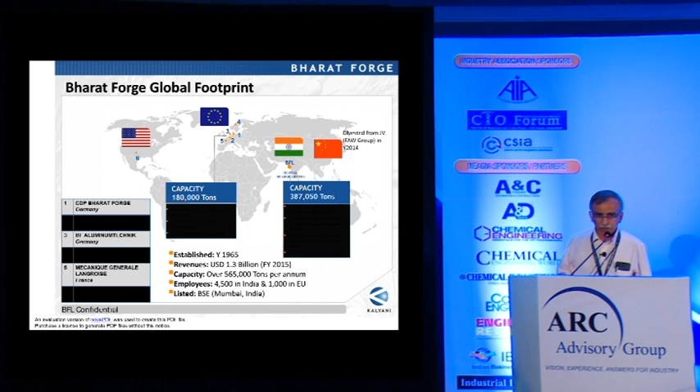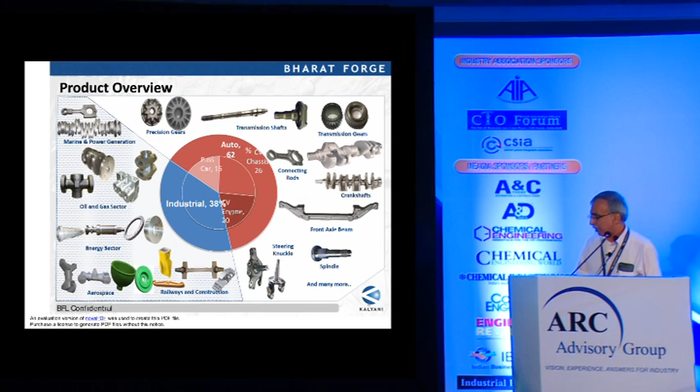Talking about the footprint from a global perspective, primarily we have manufacturing facilities in various parts of India, and then in Europe. And our combined capacity is something like 565,000 tons per annum. And this is primarily to take care of various global customers. From a product overview perspective, 62% goes to automotive industries, both the passenger car, commercial, and off-highway and military vehicles. And then 38% comes from industrial products, which covers oil and gas, energy, aerospace, railways, and construction. So this is how the product portfolio is distributed.

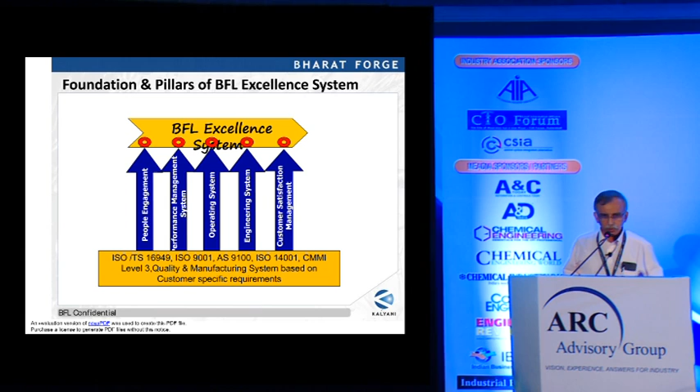Talking about the mantra of excellence, we started this process about 5 years back. The whole objective is to achieve excellence in everything we do, right from the human resource function to the sales function. And this is what is helping us to stay fit with the competition growing and the profit margin shrinking. So this is what we believe, and this is what we do every day. So primarily it has 5 pillars: the people engagement process, the performance management systems, operating systems, engineering systems, and customer satisfaction management. This is a dynamic process, and every year we keep calibrating this model as we keep learning lessons with what has gone wrong and what we learn from new business opportunities and what we learn from new customers. So this is a dynamic model that goes through calibration.

Like any initiative, there are specific tools under this initiative, and the specific tool which is relevant to IIoT is value stream mapping. That's what we see here. In simple, value stream mapping, as you all know, is a tool for doing more with less, eliminating the waste in the system, and it also helps to increase velocity in the organization. That is how we have defined value stream.

And one big difference is that we do value stream mapping not only in manufacturing, but in every process, right from a human resource process, financial process, engineering process, etc. So we have really used it to the full potential as far as the power of the tool is concerned.

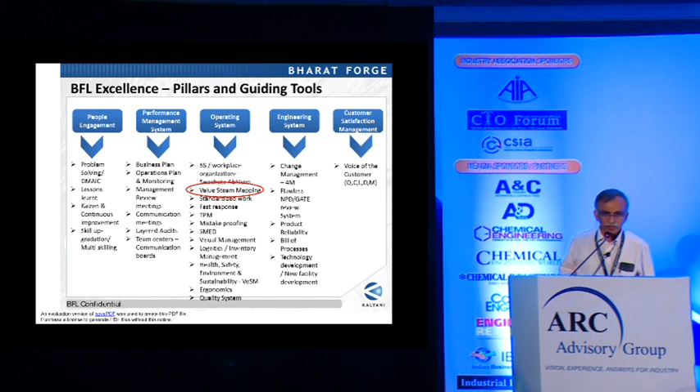Now, this is just to tell you, we did about 22 value stream mapping exercises covering various functions, both manufacturing and non-manufacturing, and that is how we could generate a lot of ideas for improvement in terms of waste elimination and increasing velocity in the respective function.

Now, coming back to value stream mapping, it typically talks about three things. One is a material flow that covers quantity moved, distance moved, and time. As far as information flow is concerned, a conventional value stream map talks only about the medium of information flow, whether it's electronic or paper-based or some other means.

So what we have done is we have strengthened the value stream map using two more aspects. One is, what are the media breaks happening in the communication process? What are the media breaks happening in information flow, which is very important in the organization as you get into a growing business, especially with multiple sites, doing business with multiple customers.

And the second thing is, what is the scope for digitizing what you do? So these are the two additional things we try to cover in value stream mapping and identify all those hidden potentials for addressing that activity.

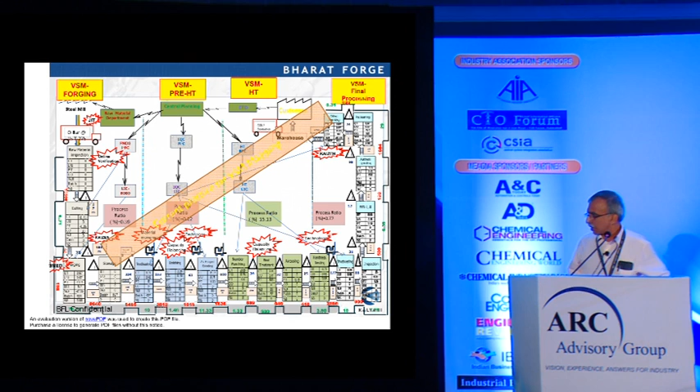This is how a typical value stream map looks like. I don't have to explain what it is. What we have done is, you can see something at the bottom here. We looked at all operations in terms of what is the information we are generating. Somebody talked about the data getting converted into information and then information aiding the intelligent decision-making process. So something very similar to that we try to do.

What are the kind of reports, how many reports we generate, and what's the total number of functions involved, and then approximate time required for each function. So we try to do an industrial engineering analysis.

Then the maximum time consumed or spent for the report, because there could be one bottleneck report which is very important for decision making. And then number of people and functions involved in all these transactions, and number of agencies to whom this is communicated. It's a very complex process as you start mapping. So this is the difference we try to bring into value stream map, which is normally not done.

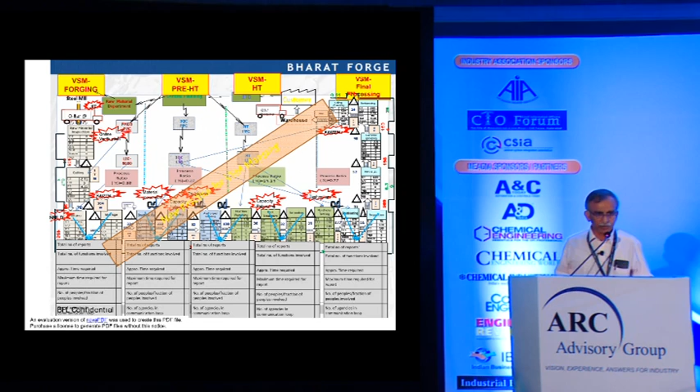So after that, we started analyzing this data in terms of what we can do to kill the waste. So we followed a simple methodology of ECRS, which is nothing but eliminate, combine, rearrange, and simplify. It's a very simple tool, but a very powerful tool to kill the waste in the organization. And that is how we could integrate Industry 4.0 and value stream map. So value stream map provides the input and IIoT gives the solution.

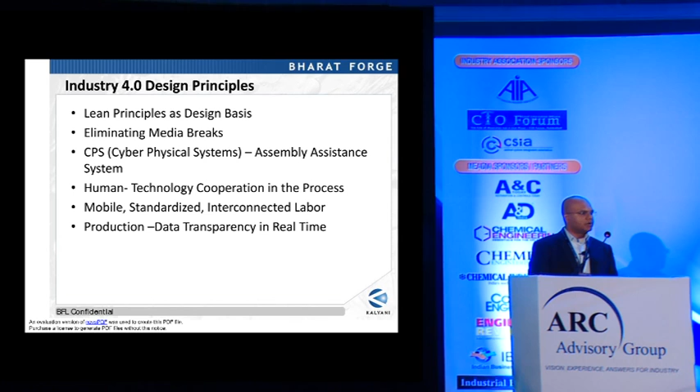We have decided 5 building blocks on which our Industry 4.0 journey will be built. The first is all the information which flows from top floor to the shop floor will be online and digitized. Second is all the information which flows from shop floor to the top floor will be again digitized and made real time. Based on these 2 flows of information, it will be visualized. So visualization will be built over this set of data.

So I'll present a case study on one of the forging lines where we have done the implementation of industrial IoT, or the top 3 blocks: the information flow from top floor to shop floor to top floor, and visualization of the data. So this is a 10,000 ton forging line where we primarily forge crankshafts and axle beams.

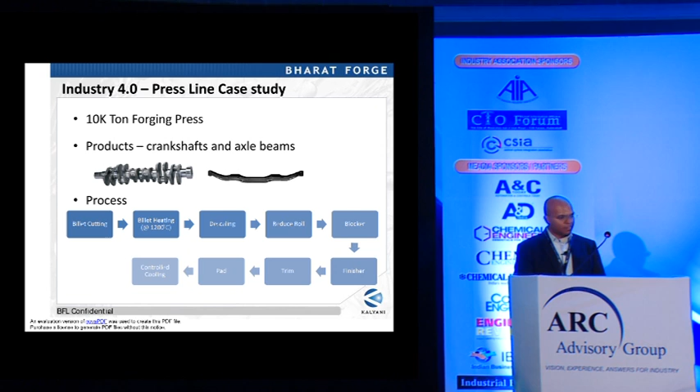The process is we get the bars. Bars are cut into cut-to-size billets. They are heated to around 1200 degrees Celsius. Then they are descaled. It goes through a preforming operation called reduce rolling, then a blocker operation, a finisher operation. After that, the flash extra material is removed, trimming, and then padding to realign the geometries, and then controlled cooling. So this is the process flow for the forging line.

The KPIs we monitor on this line are OEE, equipment utilization, productivity, material input and output count, so reconciliation of that count, how many billets were fed into the line, how many were the dropouts at what stages, and what was the final output number, and also the SPC, the product quality measurements.

There are a number of reports which are generated. There are about 7 BFL excellence charts which are generated daily. In every shift, 5 reports, so 15 reports are generated. All of these are on paper. Operational charts, quality charts, several of them. The measurements taken on the quality bench after the forging comes out at the end of the line are all manually done.

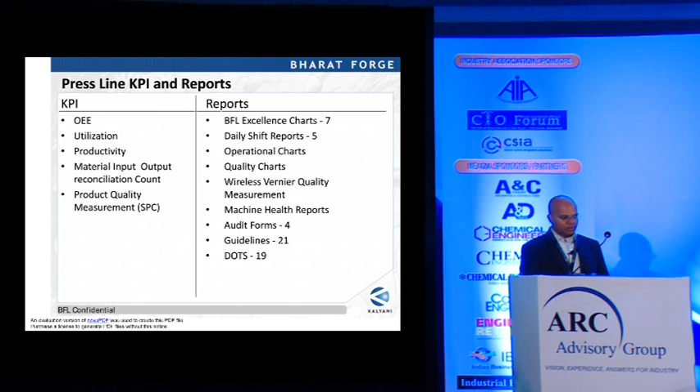Machine health reports, audit forms. There are 4 audit forms: layer audit 1 and 2, and then several machine audit forms. 21 guidelines and daily operator tasks, 19 of them. So all of this covers the complete gamut of reports and information which flows from top floor to shop floor and shop floor to top floor, which we have got on a single system and made online.

This is a general architecture of our line, where all the machines, starting from the billet cutting machine to the final cooling conveyor, are on a shop floor network. Now our shop floor network and office networks are totally separate networks. There is no communication between them, primarily because of the security and safety of those machines. So the office network doesn't talk to any of the machine networks.

That's why we put in an intermediate computer which reads the data tags available from the main press line, which has the master controller and is connected to all the other machines. So this central computer reads the information from the master controller and releases it to our data center.

So the data center is protected by firewalls. All the information which comes in and goes out is very much controlled.

Over it, the complete visualization and reporting layer is built, and then we provide reports. We'll have a look at several reports for all the stakeholders.

The stakeholders are the control panel room, the person running the line, the line supervisors, the shop floor manager, and the top management.

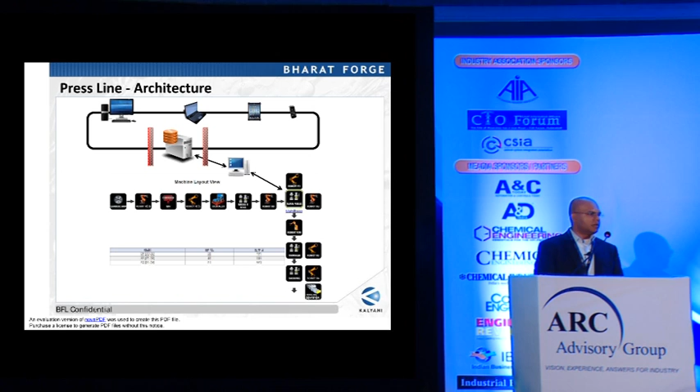So we have placed large screen dashboards in the line and also provided touch screens to the control panel operator.

Primarily the touch screen is where he only does the qualification of the downtime. So he gives, if there is downtime, what is the reason contributing to it. That is the only input he gives.

So today the manual entry on all the forms, the 5 reports and 19 dot forms and all the downtime report forms are eliminated, and all of that is now online.

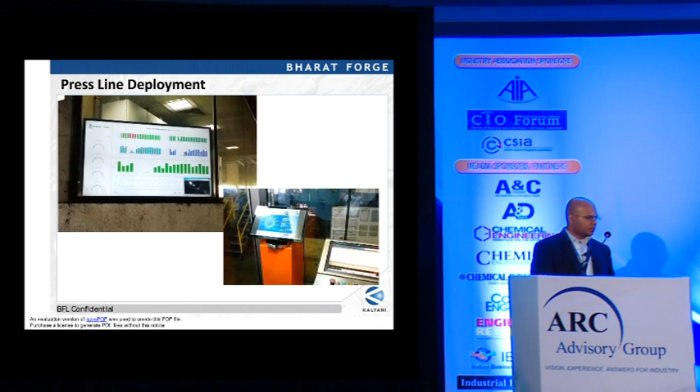Currently, we are also trying to remove all the other reports, because all of them are printed on paper and then displayed on the display areas in the line.

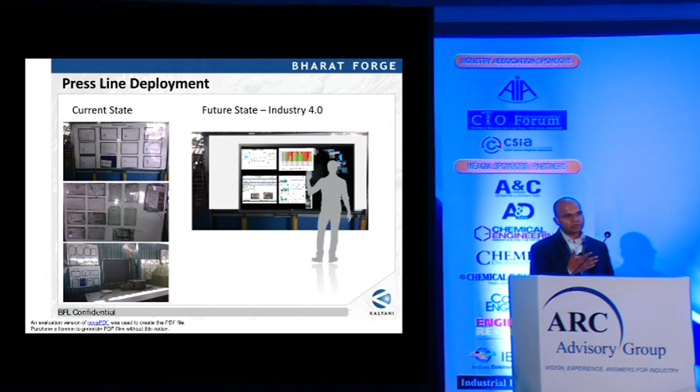We want to eliminate all of those input screens so that the reports shown can also be live on the dashboards on the shop floor.

What we do is we collect about 60 parameters from the master controller. These are 2 types of parameters: one is machine health parameters, where we capture the temperatures for the bearings and the lubrication cycles.

And process parameters, for line performance, where we capture how many billets were fed into the line, how many billets were coming out at the end of the line, what temperatures each of those billets were heated to, and what forces were applied.

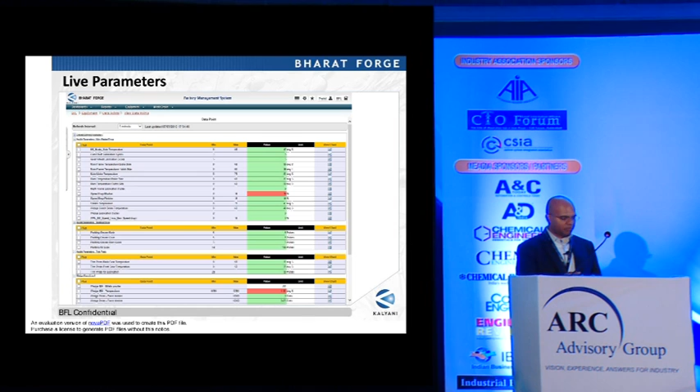So for each billet, we are capturing all of that information in real time and generating all the reports and dashboards which we saw earlier.

So an executive dashboard shown to the top management shows whether the line is up or down. It shows for the last 24 hours what has been the performance of the line, the trends of APQ and OEE, total number of parts produced, and also for the last 1 hour, the temperature trend.

So how the temperature trend has been for all the billets coming out. It also shows on the dial gauge the last 24 hours performance in APQ and OEE.

Along with it, it provides all the analytical reports required by the shop in charge. So it shows for the last 7 days what has been the APQ, what has been the performance of the line, and what has been the Pareto of the downtime reasons.

It also shows the die-based performance. This is available for 90 days, where we can deep dive from quarter level view to a day level view, and for 7 days, where we can deep dive again 3 levels to an hour level view.

So we can deep dive to a very specific hour, seeing what dies were forged, what parameters were there, at what temperatures they were forged, and what was the machine setup for the forces. All of that is available.

So this is another chart where it shows the last 90 days of performance, showing what all dies were forged, what all parameters were used to forge them, and we can deep dive into each one of them. So this is another view of the same report, showing the benefits which we have been able to achieve.

As this is a work in progress project, we are still learning a lot of things, but a few of the things which we have been able to achieve is eliminating a lot of manual data gathering and reporting. It has effectively eliminated about 2,000 hours of manual work annually. It has increased data integrity and availability, because earlier whenever there was a manual entry for downtime duration, there was always a question whether it's a correct record or not. Now we don't have such questions.

It also enables real-time OEE monitoring. So anytime anybody who is enabled can go and see what the OEE is and what are the contributing factors for OEE not meeting a target. It shows the equipment and process parameters in real time, and also enables faster responses if a situation arises where any of the points is out of control range.

It also has quality monitoring. At the quality bench, all the quality parameters which we measure are also going to the same system, so we are capturing the quality parameters against the production batch. SPC is also built over not just the quality parameters, but also all the process and forging parameters. SPC analysis can be done on each one of those.

It also has email and mobile alerts, and escalations are also built into them.

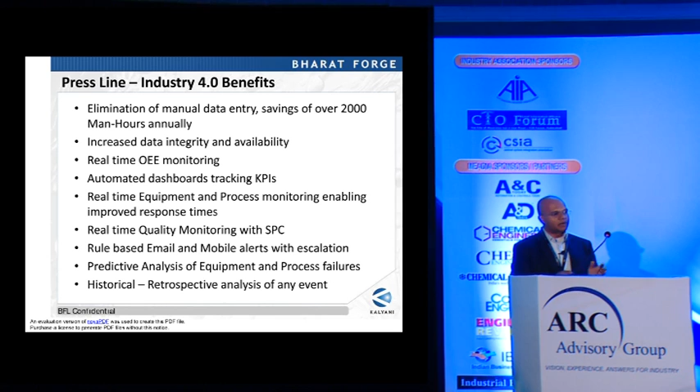Moreover, it also allows historical or retrospective analysis of any event. So if there is a question about a part in the machining shop, asking what were the parameters used to machine this because they are seeing something unusual, we always have all the history available for each billet, and that is a very strong point where we know what we did and what was the final result in the machine shops.

Other than industrial IoT, two of the other enabling building blocks are the digitization of material flow, where challenges in forgings are that the parts are at 1200 degrees Celsius, nothing survives on it. So that's one challenge which we are currently dealing with - finding out how we will track each billet from forging till the machining where it gets finally shipped - and also die tracking.

So currently we are implementing one of the projects for die tracking, and digitization of various services. All of those services are the enablers of all the production which happens - engineering processes, quality processes, all the administrative processes. Those are also several projects we are running, which, though not purely industrial IoT, are enablers of industrial IoT to happen.

So those are the 5 building blocks under which we are doing several projects. And from the first industrial IoT project, or Industry 4.0 project, this is our learning project. We want to learn from this and incorporate this learning into the project, and then deploy Industry 4.0 enterprise-wide. And that's the roadmap for our Industry 4.0. Thank you for your attention.